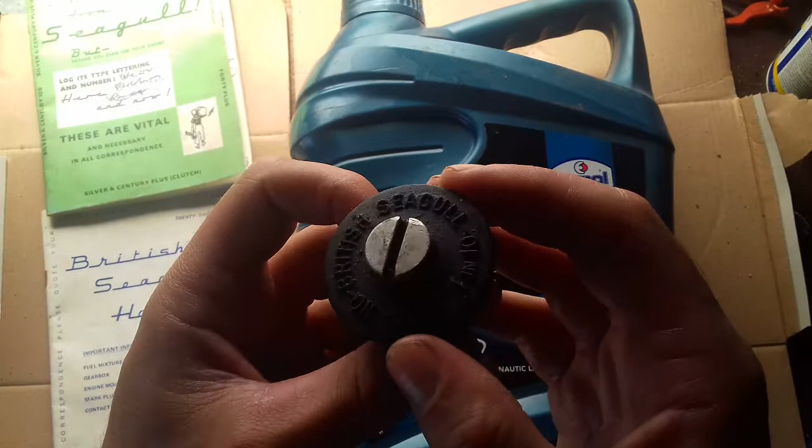This video is on the British Seagull outboard, two-stroke mix, ratios and different types of oils you can use. I suppose first of all you want to determine what ratio you're going to need for your particular Seagull. Now when you go online it'll probably give you a ratio like 10 to 1, the most common one there, and it actually says it on a lot of the caps. You can see this one here, British Seagull 1 in 10, which is the same thing as 10 to 1. So it's 1 part oil to 10 parts fuel.

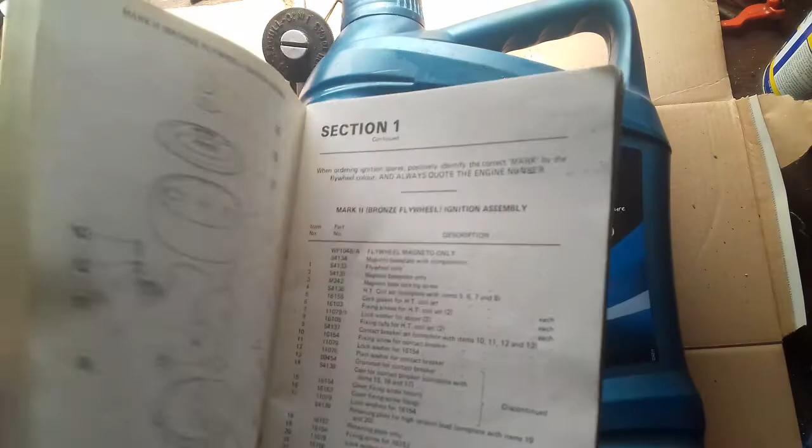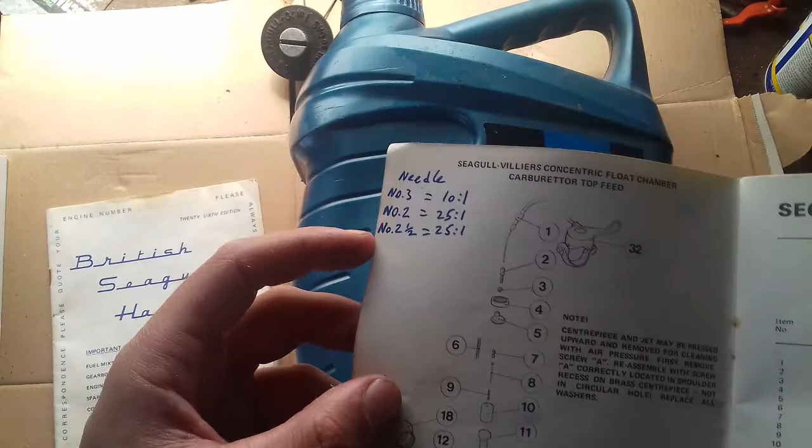But if I had an engine that I didn't know myself and I wanted to check the ratio, if you bought one or someone gave you one, you could check the needle on the Villiers carb. So you'd be taking out this needle here and checking the number on the side of the needle. If it's a number 3 it's a 10 to 1. If it's a number 2 or a 2.5, it'll be 25 to 1. The number 2 and number 2.5 have been converted to the 25 to 1. The standard needle would be the number 3. Some needles might have actually nothing on them. That's the new type needle as well, that's the 25 to 1.

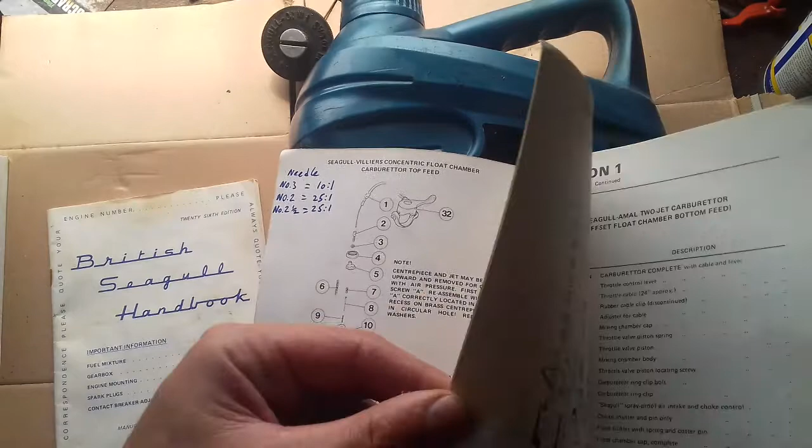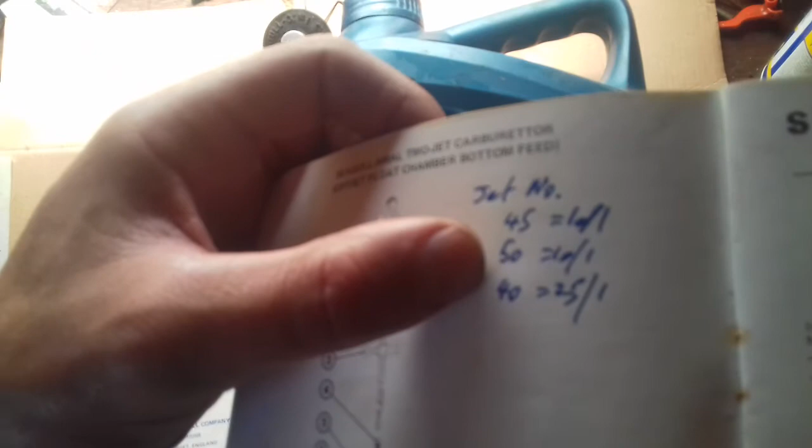That's on the Villiers carb, and on the Amal carb you have a jet number 45, it's a 10 to 1. A 50 is a 10 to 1, and a 40 is a 25 to 1. You need to take out your jet back here. Now I have a video up on how to take the jets out of that and how to take the needle out of this one.

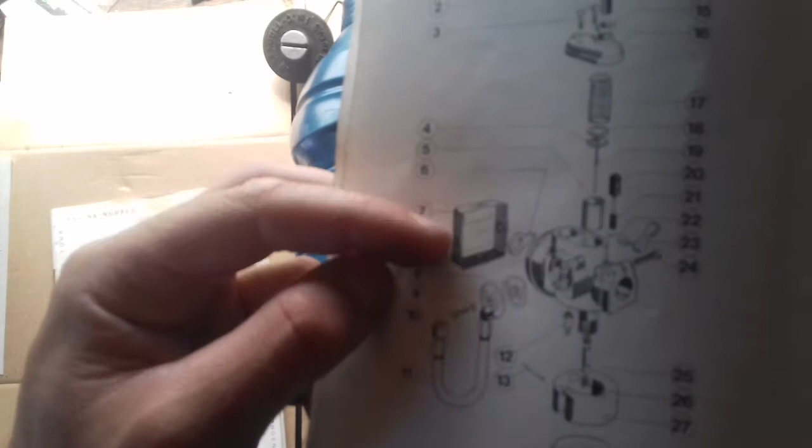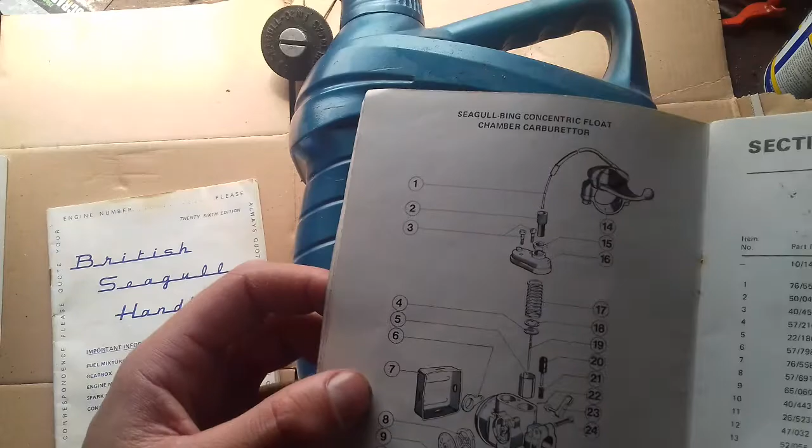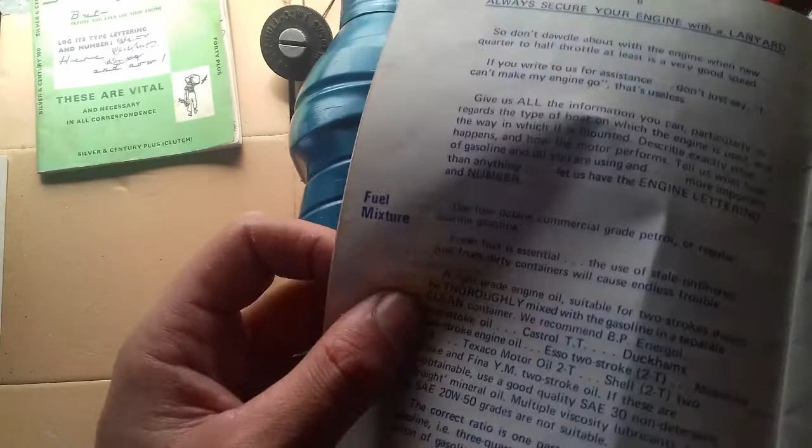The Bing carb, that's there as well. You can see it there, it has the little steel cover on the outside of it. If you have that particular carb, it will actually run anywhere from 10 to 1 to 25 to 1 without any adjustments or any needles to be swapped over. So that's the actual ratios, and here again it says it for your fuel mixture in your book. It just means it should be thoroughly mixed with the oil. It gives you different types of oil you can use.

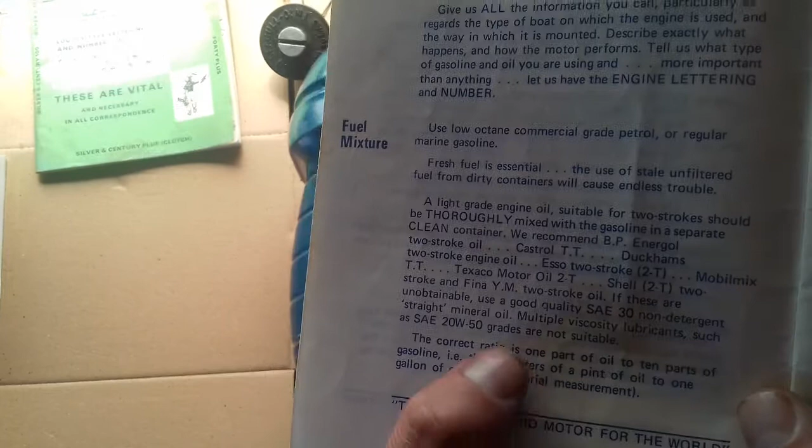Now it does say down here you could use SAE 30 mineral oil. I prefer to use the proper outboard oil, because when your machine is running, these Seagulls run a lot cooler than a lot of standard 2-strokes. I wouldn't be running motorcycle oil through it, or hedge trimmer 2-stroke oil. I'd be running the outboard 2-stroke oil in it, and make sure that it meets the requirements of TCW3 or TCW2. That way you should be covered.

I usually make it up a gallon at a time, so I'd be putting my oil into the gallon, and I'd put my petrol in at a 10 to 1 ratio. Give it a good mix, and I'd even give it a shake every time I pick it up to fill it over the coming few days or week or so. Just make sure you keep your fuel fairly fresh as well. Make sure you've nothing there more than a couple of months old. I'd scrap anything more than that, just to be on the safe side.

So that's more or less it on the 2-stroke oil. Just make sure you check those jets and needles in case it has been converted, but the 10 to 1 is the most common fuel mixture. It does sound a bit much to have a 10 to 1 in it. You'll be thinking most of these strimmers and hedge cutters are all 50 to 1. They have to be a 10 to 1 to seal up that crankcase. It won't seal up the crankcase on these lighter mixtures, and it probably won't run as good either. So you have to have that 10 to 1, or it may have been converted to that 25 to 1, but just make sure you check all that out. And that's more or less it.